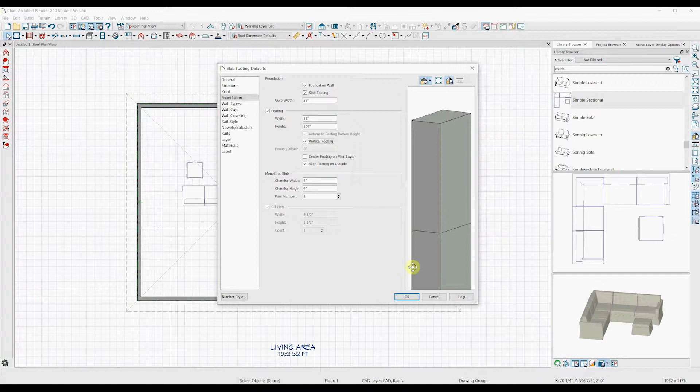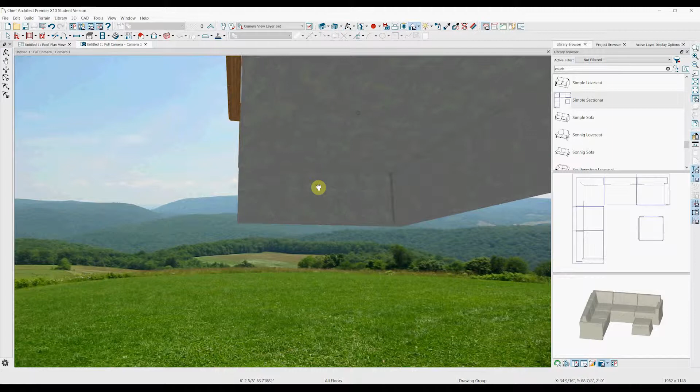Select OK. So that's a monolithic slab, and I'll show you what that looks like on the house. So when we click OK, you see here it's looking really thick, and then we will use the camera view on the outside and see what it looks like. And that is what 100 inches of foundation looks like. So that is what the slab is. It's literally just a slab of concrete, just about as simple as it gets.

So you'll notice here that when we're looking at the foundation, we're actually on floor 0 in our floor menu right here. So if you're on the floor, designing things, you can go down and check out where the foundation is. So since I left auto rebuild foundation off, if I move this wall way out here, let's go back to the camera, and you'll see the foundation did not move with it. Now there's just a wall sitting out here with absolutely nothing below it. So you're like sitting in your kitchen, and then you just fall off.

So we get out of this camera, come back here, we'll go to the foundation, delete foundation, okay, and we'll put this back to normal, and we'll build another one and leave this setting on like it should be, or like it would help in this situation. So build foundation, automatically rebuild foundation, and then leave everything else the same. We see it, look at it with the camera. It looks good. It bases the foundation off the first floor that you have already.

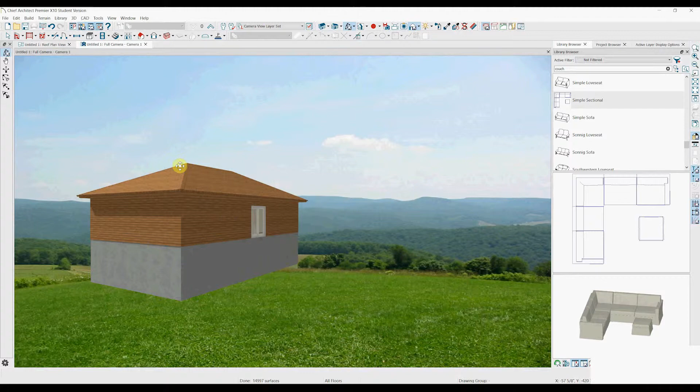But now, if we go back to the first floor, we select a wall and we move it way out here. Now we go back here, the foundation moves with it. Since the roof didn't have auto rebuild on from the last tutorial, the roof didn't move, but the foundation did. So that's just something good to note. So I'll go back and delete the foundation. Again, we'll look at the other two types of foundation.

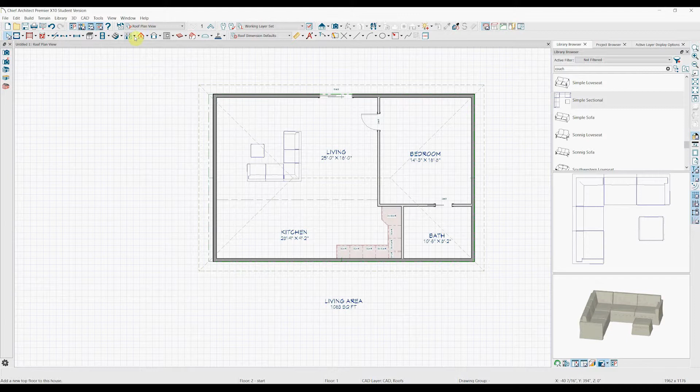And wrong one. So build foundation. We'll go with grade beams on piers. So this one, the grade beams on piers doesn't really make a lot of sense when you hear it, but I'll show you what that looks like. So you want to derive new foundation plan from the first floor plan, meaning that it's going to use where the walls are now to decide where the walls of the foundation will be.

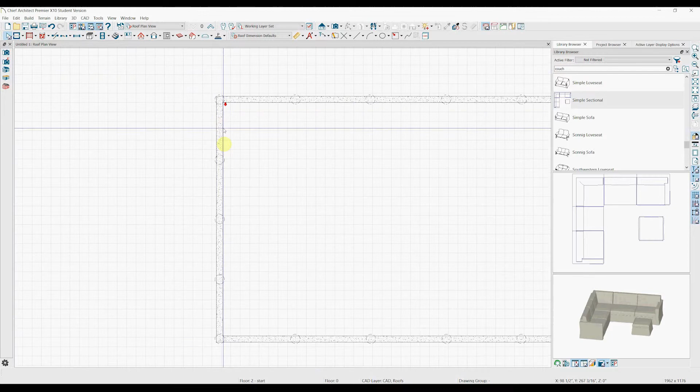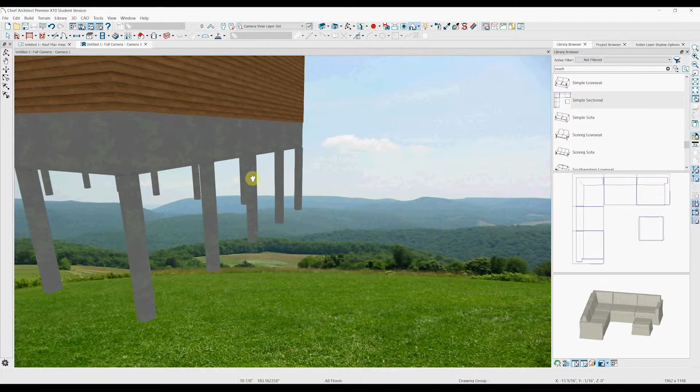So you see it's a concrete wall, that's what that is, with these little circle pilings. So you might be like, why do you need both of them? But when you go to the camera view, you can see how these pilings go down into the ground further than the actual first bit of foundation. So that's something interesting. That is essentially what that type of foundation is.

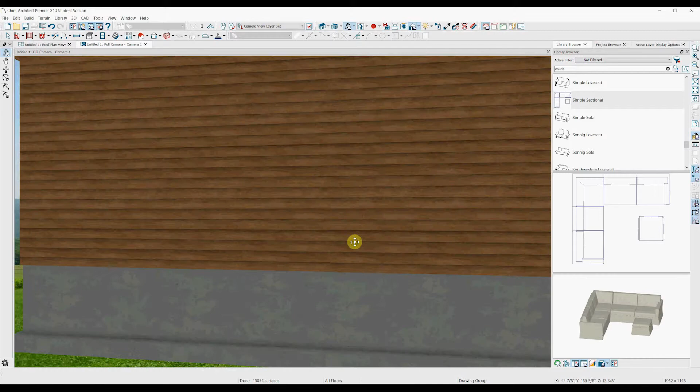And now I'm going to delete that and look at the final type of foundation, which is the walls with footings. Very similar to the monolithic slab in some ways, but I'll show you the difference once we go into the camera, is these little footings right here. You can see, if we look at it from the side, there's a little foot on the bottom, it's a little overhang on the outside. That just helps make sure everything's secure. It's just a different style of foundation than the other two.

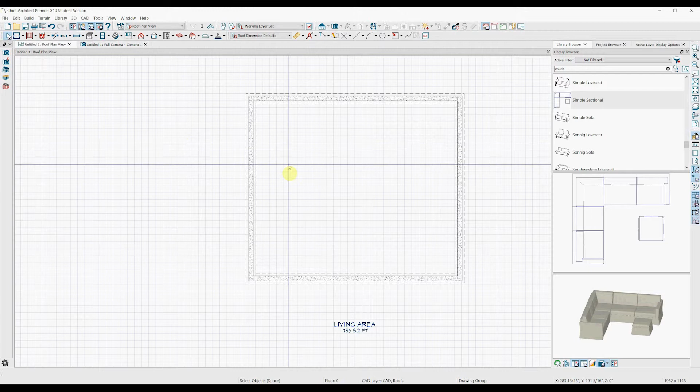But pretty much that's really all there is to foundation. There's not a lot of fancy stuff that goes on. If you really needed to, you could move the foundation walls or whatever. But of course, you wouldn't want to do that because that would leave half your house off the edge. Other than that, you can go in here and edit different thicknesses, things like that, as you could with other items. You could change the material if you didn't want it to be made out of concrete, stuff like that. But other than that, it's pretty simple as far as foundation goes.